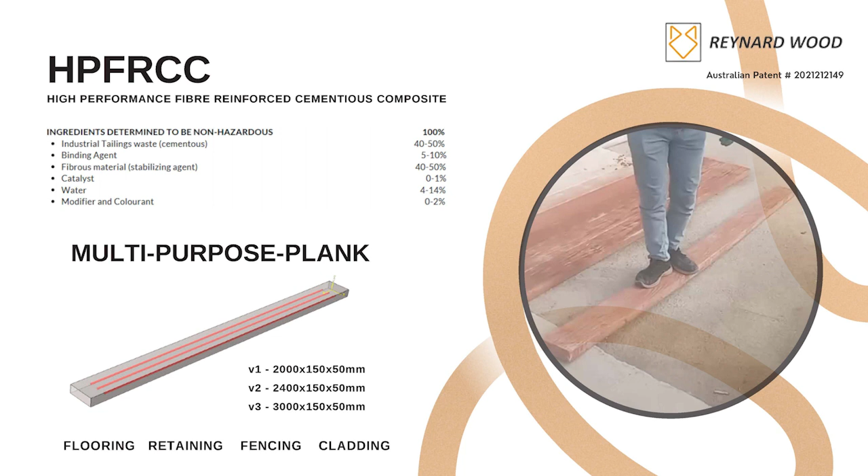Version 1, 2 metres, made to fit inside a container as prototype. We've now passed nearly 4 years, tests, no complaints. Now version 2, with market research and feedback from builders for the right size, and we're only just doing the testing now in country, but the factory has increased quality and performance from version 1. Version 3 is not yet developed.

How we measure the carbon or the benefit with this product is through a life cycle assessment and carbon product declaration and environmental product declaration. Reynard Wood is an early entrant to the market. With version 2, we can now help retrofit existing built systems, so you don't have to replace the whole system, which helps the environment.

But then obviously it's got the waste materials from the industrial tailings, gathering of those materials, limiting other high intensive processes, not putting any Portland cement, using fly ash, biogenic carbon using grass type plants and other methods. The environmental declaration is pretty much a workflow from cradle to grave on how we're actually producing this at the moment. Aussie operations, very low cost, work from home, outsource the logistics.

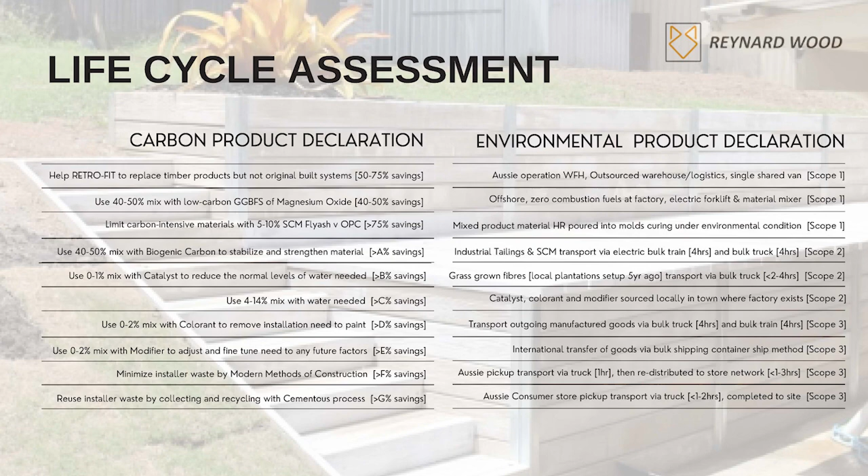The distribution channel is large, so looking through the independent hardware group channels, potentially maybe in the future with Bunnings, but we're there to start scaling out with the new version.

History: starting out mixing in a cement truck, bringing it to market, testing it in the markets, being very responsible, working in a landscape outdoor environment, testing the strength of this product. A lot of people will say it won't work, and it does. It's not breaking apart, it's maintaining its solid state, and it's looking very positive.

So there's another 2,000 planks on the way off the ship to start restocking. The next challenge will be to keep the flow going and expand from the 20 stores we've been in the past to reach the 300.

Certificate: Australian patent and worldwide patent. The worldwide fits in with the strategy to be global. So the interest is to support Australia to enable this capability for consumer products, but then also promote worldwide as an Australian initiative, showing responsibility in our biggest export of sales and making byproducts out of that waste.

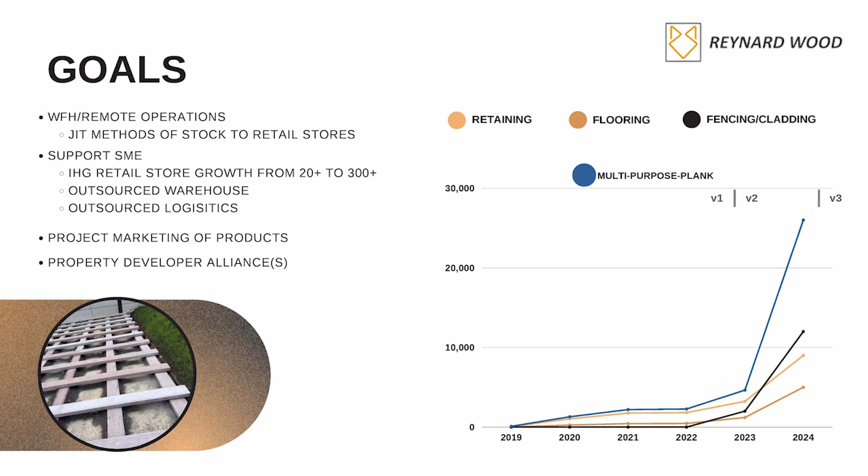Goals: you can see from the multi-purpose plank product with its versatile capability of retaining, flooring, fencing and cladding, how the sales can accelerate. We've only really been firstly sort of machine gunning out to 20 odd stores throughout New South Wales, but really focusing on a core 1 or 2, which are doing really well.

So now just to replicate that one store throughout a whole larger network will be the next challenge. We've got an outsourced warehouse set up for Sydney and Melbourne, and Brisbane will come online next year.

And then what would be really ideal is project marketing of these products. Developer Alliance could probably help that, but ultimately, the biggest barrier is the installer wanting to stick with timber because it's what they're used to, and sometimes they might feel they get a job done quicker.

So, in summary, I'd just like to say the best defence against global warming is recycling, which is what this opportunity is. Thank you.

Questions? I was trying to get away from that thing. From us? Excellent. Thank you so much for that, George.

How much recycled material, on a percentage basis, goes into a volume of product? Currently it's at about 55%, and that could possibly be increased. Ideally, the reduction in use of fibres as we go, or perhaps installing more longer structured bamboo rods that we've had in the past, could take up some more volume.

How are you overcoming the strong preference people have for natural wood products, in your approach and expansion? Where the stores are really selling it well to their customers, they're enabling it as well, because a lot of the timber products we're focusing on in the landscape area have dangerous chemicals injected into them, like arsenic, going into the ground. This product has none of that. Unless it's pulverised, the fly ash won't come out, but other than that it doesn't leach. It's very good for the environment and for humans.

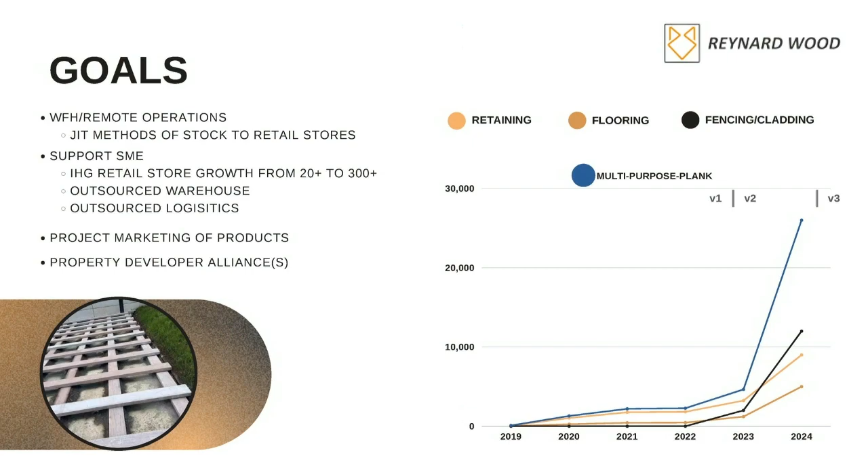Have you looked at railway sleepers? I'm a kind of small startup, so I know that would be a huge opportunity, and I'd probably need some networking and other ways of getting in to help source the materials in that space.

Thank you. Here we go.

When's the best time to plant a tree? Most of us know that's 20 years ago. So equally, climate technologies and sustainability technologies, we needed to start 20 years ago as well. We need to do the energy transition - we all know that. Renewables are a big key factor in getting to our net zero ambitions. But we know that the supply chains, the built environment, there's a lot of embodied carbon that needs to come forth in products, and this is why we're here. This is why we love MECLA and the initiatives happening. I'm a proud member of MECLA.

At MCI Carbon, we're looking at taking emissions and stopping them from going up into the atmosphere, transforming them chemically into products, embedding carbon into the built environment, like concretes and cements. We're making these products with partners like a low emissions or negative emissions plasterboard with a major global player. We're looking at cement products too, and we've got one of our cement products down there. I'll talk about the journey a bit, because it's important to understand how this technology is born out of inspiration from Australia, with a global view to helping solve climate change. We're really looking at transforming large-scale CO2 into products.

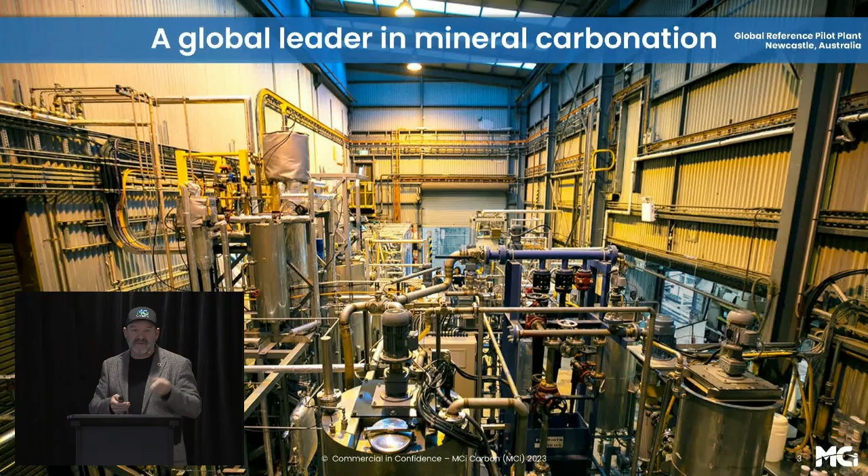MCI's technical headquarters are in Newcastle, and this is what we're running every day with our customers — taking feedstocks, CO2 sources, and then making products. Testing those products with our customers and with different groups around the world, getting the specifications, and then taking them to market. So we're building a demonstration plant now.

We won $14.6 million two years ago from the federal government. We've matched that with our own investor money. We're doing a capital raise right now, and this will basically transform 10,000 tonnes of material, which we're using on a large scale with our big industrial customers to do big trials. So we're ready at the end of next year to start doing big trials with the likes of Laing O'Rourke and others to basically get this into market.

We have a massive demand signal from our customers. If we could make 1 million tonnes now, we could sell it. So we're very, very excited.

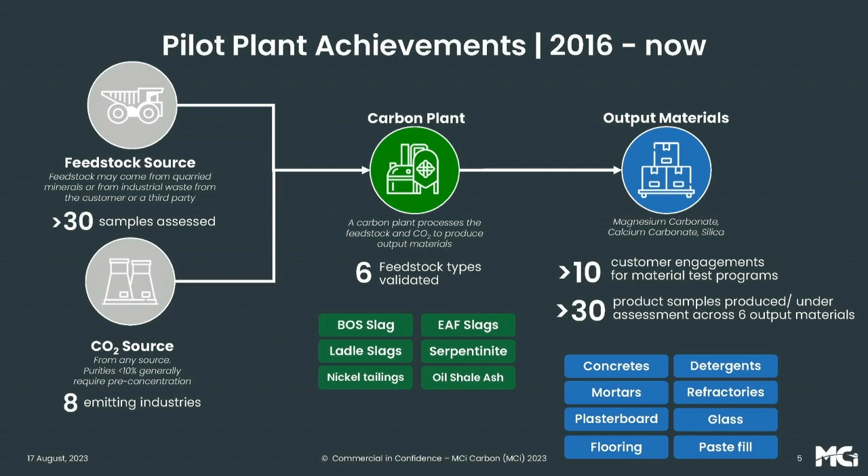We've done a whole lot of characterization of the techno-economics, the validation of the technology, the scaling up of the technology. This is built with chemical engineering expertise out of Orica over the last 10 years. We built it out of their group, and they now joined MCI as the team. So we actually were born out of one of the biggest chemical engineering companies in the world, the biggest explosive manufacturer in the world.

So we're looking at slags, serpentinite, oil shale ash, all kinds of nickel tailings with big miners. Any of these are our feedstocks, and we can transform them into multiple products. So we built a platform, not just one product — this is a platform technology that can be integrated. It's like a carbon refinery that would sit next to an emitter that has feedstocks locally and has local markets and also international markets.

So we've been doing a lot of characterization, testing these products for strength, as substitutes or as new products in the market. It's a very big play on our part. We're very well supported by governments now in play around the world. We've got a whole lot of really top quality expertise — 50 people and growing.

We're big in Japan. We've got the Toshu Corporation invested in us, and Mizuho Bank this year. We're off there next month, and we've got a whole lot of different customers. We're helping the Japanese decarbonise. So we've got a whole lot of emerging markets, a whole lot of emerging customers.

We are a great team — that's what we are. MCI is a fabulous team. We're committed. We're on a mission to put away 1 billion tonnes of CO2 by 2040, and we're looking for supporters in that and advocates, and we hope that all of you here today will become our advocates.

What are your biggest pain points at the moment to take it to that vast scale of commercialisation? Funding, absolutely. The biggest barrier to everybody at the moment is there's not the kind of capital required to accelerate our climate ambitions with all the different technologies. The financial markets do not have the gearing around risk to bring through technologies that need to buy risk and accelerate adopting the risk to get through. So there's a big gap. The classic chasm of death exists for technologies like us that are TRL levels 6 and 7 to get to the next stage. It's a very big challenge, and we need discount rates of 1% rather than 22% for new technologies. This will come with green bonds and the like, but that's the biggest challenge for everybody right now.

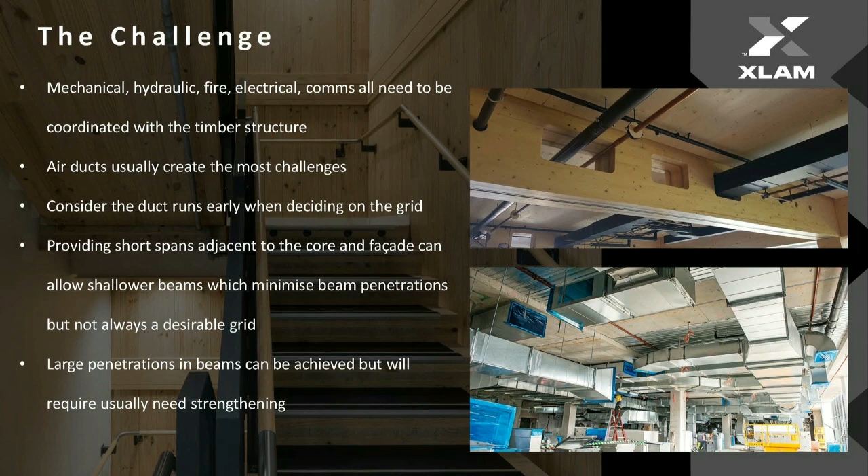So that led us to looking at this product that we developed in-house over a number of years. It's been kicking around for 3-4 years now. The idea is that essentially it's a lower profile floor system, mimicking the look of a concrete band beam structure, which everyone's probably well familiar with, along with some of the advantages of that sort of system.

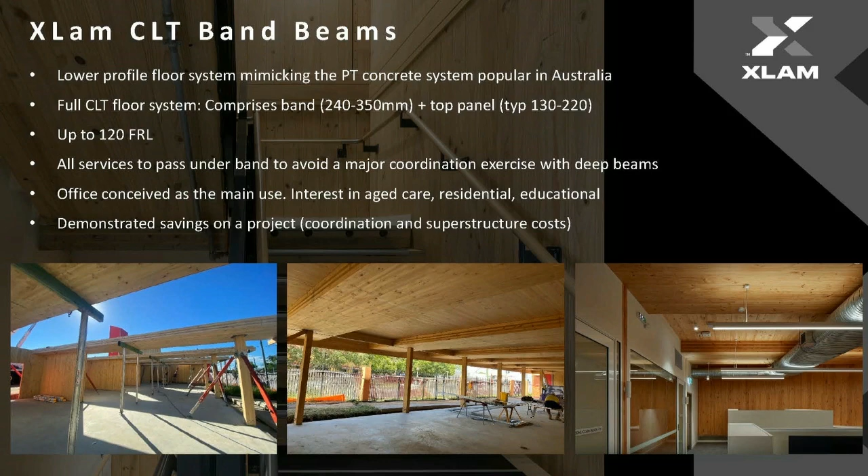On the bottom left picture there, you can see a panel that's up in the range of 240 to 350 deep. They tend to be at the thicker edge of that scale, just for the spanning ability. Up to 1700 wide, and then another panel running crossways over the top, which forms the walking surface. That's sort of slab and beam, but think of it as a very wide, relatively shallow beam.

It was initially conceived mainly as an office application for those large commercial projects, but it has had a bit of interest in aged care, residential, and some educational projects as well, which surprised us initially. It's designed for up to 120 FRL, and we've completed one project with it, and there was definitely some demonstrated savings from a cost perspective, as well as quite a good saving on the design coordination part of it.

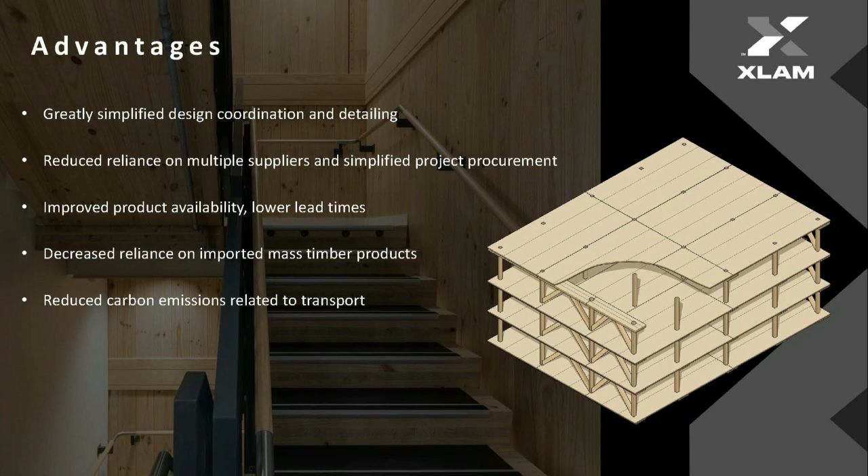So speaking to some of the advantages a bit more - it was a huge saving on the design coordination exercise. Having everything inherently run under the beams means there was really minimal coordination with the services guys. It was services-to-services coordination, not services-to-structure coordination, which was very nice for us and the structural engineers. It doesn't take away the services-to-services coordination, obviously, but that's one big thing to cross off the list.

Having a full CLT floor reduces your reliance on multiple suppliers. Getting more of your product from one mass timber supplier has advantages for procurement as well as cost. And the way CLT is produced compared to large-scale glulam, it's easier to get that volume up, and the production and procurement timeframes are a little bit better than what you'd see with glulam, so you can align that procurement timeframe a bit better with the product.

Having it all coming from a regional Victorian site to the major cities on the east coast is definitely a saving on transport compared to imported overseas product as well.

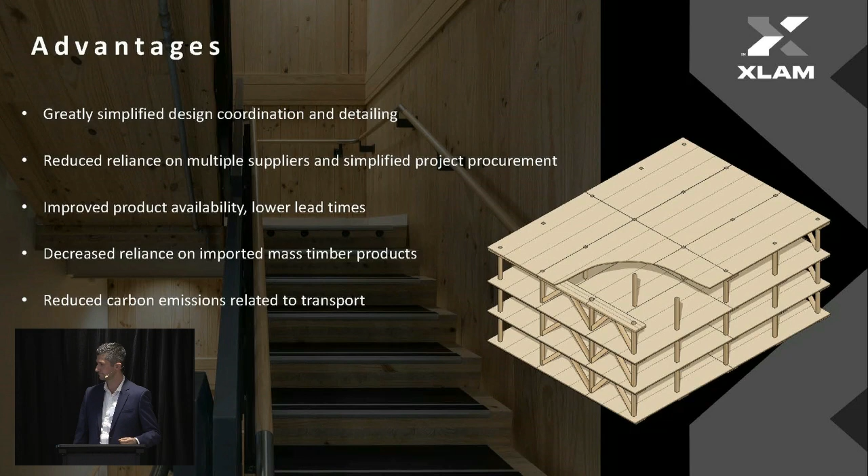From a sustainability perspective, the CLT band beams - it's just CLT, so it's the product that we've got EPDs established for. We've got PEFC certification, Declare Red List, all that type of thing. All the feedstock comes within 100 kilometres of the CLT manufacturing facility, so it's all very local in that sense.

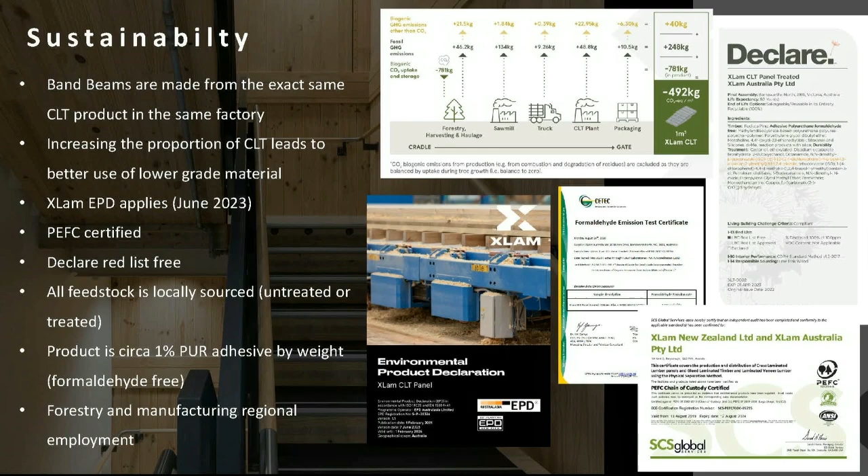A little bit of background to the product itself for those that aren't so familiar with it - it's less than 1% by mass adhesive, the rest is radiata pine, plantation-grown timber. It also uses the internal layers, the internal lower stress parts of the product, from a lower grade timber - structurally graded, but lower than the grade you're using in your framing timber - making use of that potentially not waste product, but lower value product, turning it into a higher value product.

So to wrap up, this is the availability - it's available now. It's just part of our normal CLT production, so it's available at any time. We've done some in-house testing looking at different ways of connecting the top and bottom layers. You can connect it in a way that you get some composite action for further benefit, but you generally don't need to.

We've completed a project in Queensland that worked really well. It's occupied, all good feedback on that one. We've got two fire assessments in addition to the AS 1530 Part 4 test to cover all that off. And we've got a data sheet that should say available now - we finished it last week. And we've got some ongoing development planned with the product.

Hempcrete, for anybody not familiar with the term, is a generic term for a range of insulative light masonry products made by combining hemp hurd - you can see that in the illustration on the left-hand side, it's a woody fibre which is the inside of the hemp stem - combined with a binder, a lime binder. There are a number available internationally, mostly lime-based, or all lime-based in fact, and some companies add a little bit of sand to that. We do, others don't.

The product is primarily used for non-load bearing walls - there's an illustration at the top there, that's an off-form non-load bearing wall, useful for residential and commercial construction or for retrofits. There's another product illustrated at the bottom, a lighter material we can use for subfloor and roofing insulation. The products are generally rendered externally but can be clad. Internally they can be used off-form, or clay rendered, lime rendered, or hemp lime rendered. We supply a hemp lime render - essentially it needs to be a breathable render, so it's a breathable system.

Our lime binder and our hemp lime render are manufactured in Sydney, and we source the materials regionally in New South Wales. We've been involved in the hemp industry since 1999. I began my work with hemp by farming hemp initially prior to commercialisation, then starting work at New South Wales Uni in 2000, worked there till 2006, built that first house out of the hemp that had been grown and processed, and have gone on to develop partnerships with farmers and processors all around Australia, including developing processing systems or supporting other farmers to develop their own processing systems.

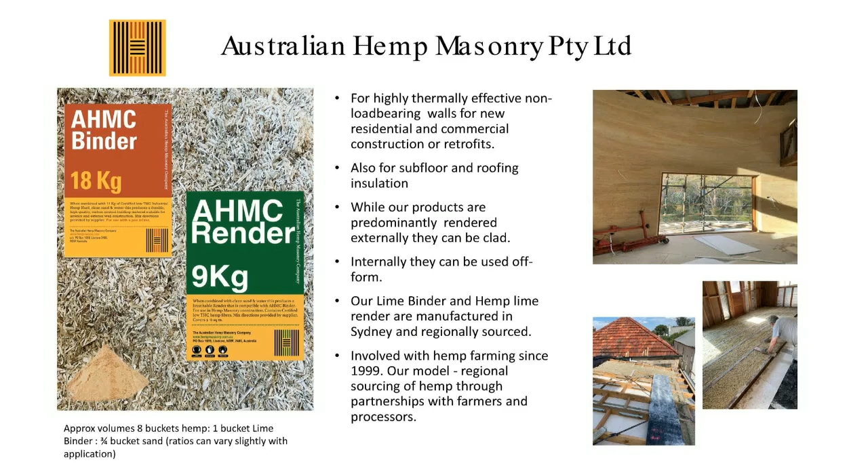The first of those was in New South Wales, then Tasmania, so we've now got some projects going on down there. Essentially the major component, underneath the illustration on the left, I've given an approximation of volumes: we're talking about 8 buckets of hemp to 1 bucket of binder and less than a bucket of sand, and that can be varied depending on the application. By far the greatest volume in this material is the fibre itself. It's a very lightly coated material that then is tamped between two forms around a structural frame.

Why is Hempcrete an innovative building solution?

It's probably the combination of performance characteristics that's extraordinary about it, that it does so many things. It's a low embodied energy product, mainly because of that massive amount of harvested carbon that's there in every cubic metre of the material. It's a long-term carbon sink, so the oldest hemp building, I think, is in Japan, a National Trust building which is 300 years old. But there's certainly plenty of evidence of durability in buildings that are based on lime.

It's a rapidly growing renewable resource, and in that I think it's quite extraordinary. A hemp crop has a turnaround of about 4 months, and in that period we can produce about 10 to 12 tonnes of dry biomass from 1 hectare, and given that this is a really light material, that's an enormous amount of material that can be produced.

Assessed as being an environmentally friendly biomass, so no risks to biodiversity. That was looked at very early on in the piece, both overseas and in Australia. Agriculturally useful, so quite extraordinary.

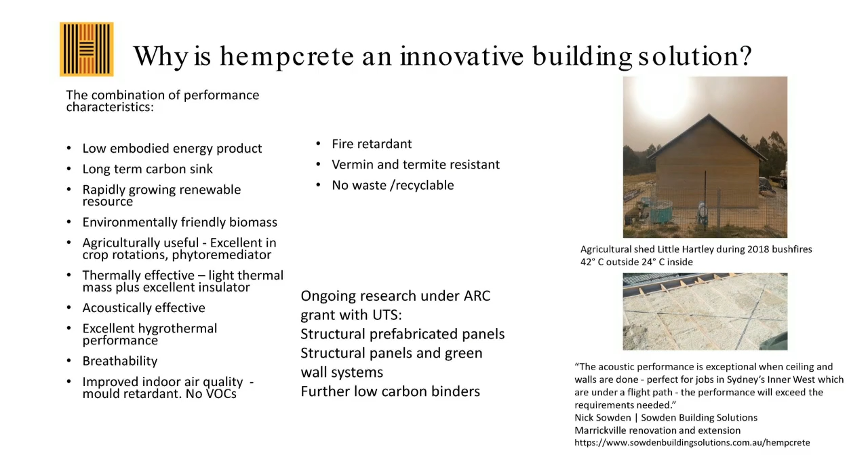To give two ends of the story, the Belgian Nuclear Research Institute used hemp and flax and assessed how they performed in taking up irradiation from irradiated soils, so effective in that way, used around copper smelters in Poland for cleaning up contaminated land. Within a crop rotation for a farmer it will give an increased wheat yield of 10 to 20%, and there are a whole lot of interactions. So it's a soil remediator or phytoremediator.

So really an extraordinary thing in what it potentially could do for carbon farming in Australia. We could really be harvesting massive amounts of carbon by introducing essentially better agricultural products that are farmed in a better way.

We're doing ongoing research at UTS, looking at structural prefabricated panels. The lived experience on the right-hand side, this is in the 2018 bushfires. Typical of hemp materials is their particularly good thermal performance, so 42 degrees outside, 24 degrees inside, with 250 millimetre thick walls, which is fairly typical. And then at the bottom, acoustic performance is also exceptional.

This was after a house was retrofitted, a renovation and extension in Marrickville, showing exceptional performance acoustically under the Sydney flight path.

Embodied carbon, so just going through this quite quickly now, 110 kilos per cubic metre is the estimated figure. We are reliant on European data. We're working, so both the Australian Industrial Hemp Alliance and the Australian Hemp Council are working on assessing carbon in hemp. But this product, my work with this product, covers both of those areas, both the farming side of it and the manufacturing side of it.

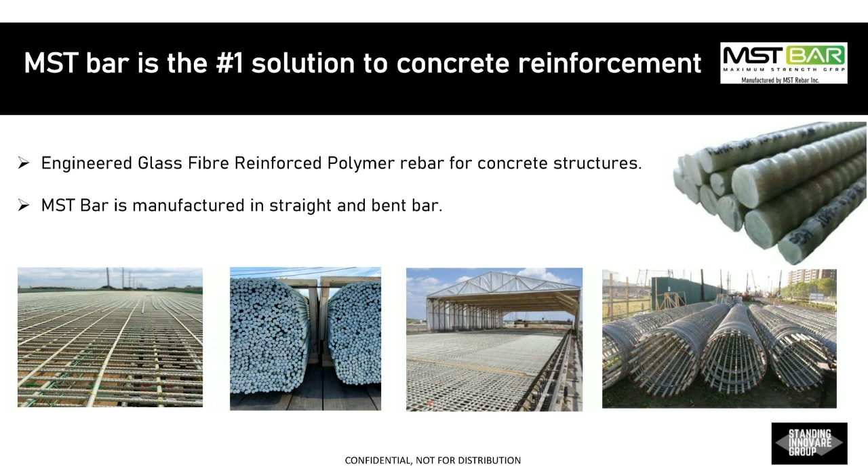MST Bar is manufactured in straight, bent bar, and flat work applications in a range of different sizes, from 10 mil up to 55 mil and larger depending on the order requirement. We believe it is the number one solution to concrete reinforcement. Why are we innovative, and why is our design harder, better, faster, stronger than steel?

It's because it's safer, lighter to install, and better handling and freight using MST Bar. It's higher performing and certainly stronger than steel. And it really comes down for us to being the premier product globally.

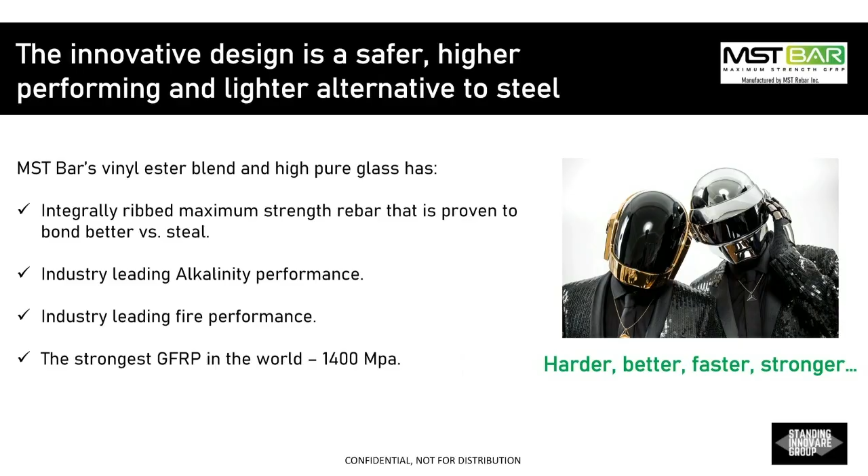Our vinyl ester blend is the best blend globally. We use the highest concentration of pure glass, over 90%, out of any pultruder globally. What does that mean? It means a couple of things. It means our performance in a high alkaline environment is second to none.

We're talking 14 pH over 3 months in a pressurized environment with no reduction in performance of the bar. Leading industry fire performance, over 700 degrees, minimum cover over 3 hours, retaining the strength of the bar. And as I mentioned, it's the strongest bar in the world at 1400 MPa average strength, whereas steel is about 450 tensile strength.

The other thing that sets us apart from others is the integral rib design. You can see here there's a rib design across the bar. That's why we have 3 times better bond strength than steel. There's no other bar globally that does that and has that design. Some will try, but they can't do it.

In terms of sustainability, we're 4 times less carbon intensive than steel. That's clear - it's a lighter product, so there's huge efficiencies around transport. If I could show you pictures of the trucks, you'd probably think it's not from Canada - it'd be somewhere else in the world.

In terms of per cube of concrete, MST Bar is about 20 kilograms versus steel at about 80 kilograms of standard reinforcement at standard spacing. What does that mean for recycling? By weight and volume it's already less than 1%. So in New South Wales alone, you can recycle MST Bar straight within a concrete structure and reuse it as a recycled crushed aggregate mix. That's a huge benefit.

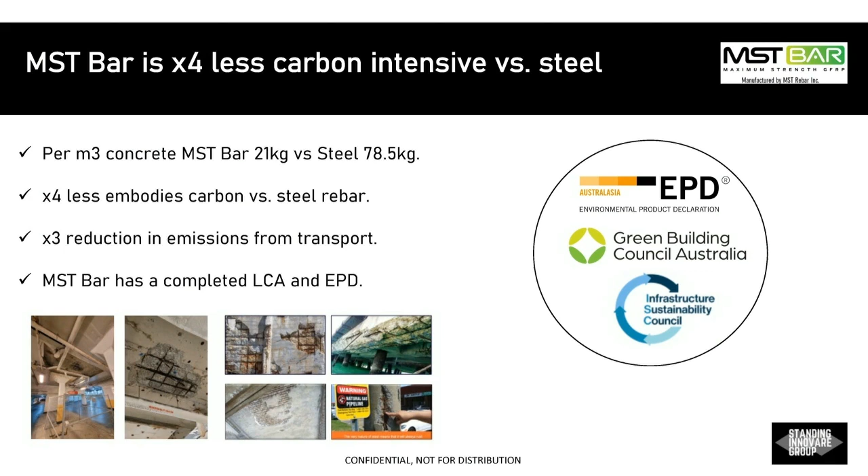We've completed the LCA and EPD, and we're working through locally for membership with the GBCA and ISC. The purpose of that is to provide contractors, designers and the like the comfort that we are going through this process, and that we're meaningfully trying to provide an option around a decarbonised product here in the market.

So with all these great things, what's the resistance? Why haven't we seen huge adoption? Well, it's a mindset thing. We're talking about disrupting steel, and steel is our biggest competitor. The biggest barrier to change is the mindset of the people in the room - trying to shift the mindset towards these early adopters.

Shout out to Fulton Hogan and Seymour Whyte for their adoption and application of MST Bar down in Victoria on MRPV, MRPA and level crossing projects. That's an example of the retaining wall structure on Pound Road that we used.

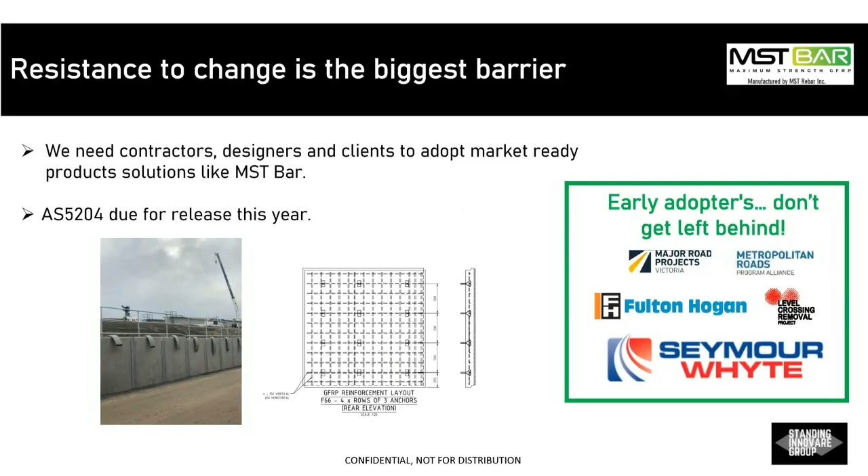So what we need is contractors, designers and clients to change your mindset and be like these leaders - be a fast follower, follow them, and adopt a product like MST Bar to change how we construct here in Australia. And yeah, that's it for me. Thanks very much.

So just to be clear, you're manufacturing in Canada, in Toronto, and bringing the product here? That's correct, yeah - we ship out from Toronto into Sydney. What would it take to set up manufacturing facilities locally?

So we need a market reaction first, to start adoption of the product. Australia actually has some of the purest glass sand in the world, so there's huge potential. We want to see the market react here and set up local production in advance of the Brisbane Olympics and be able to be a local supplier for that.

And Christopher, I know it's early days, but how are you getting this out to customers? So we import by shipping from Toronto and distribute from Sydney to Seven Hills. I meant more the sales process and your business model. We go direct to business marketing, using our contacts in industry and working with them to find solutions - so B2B marketing.

Can you talk a little more about the circular economy piece? You talked about recycling at the end of its life, but what about within the whole business model itself - if it's pure glass, how do you create a circular business model out of that manufacturing process? I think to ensure the performance of the product as a pure glass product, we would investigate some recycled glass options, but naturally it's going to bring down the performance of the bar. I don't think the market's ready for that yet.

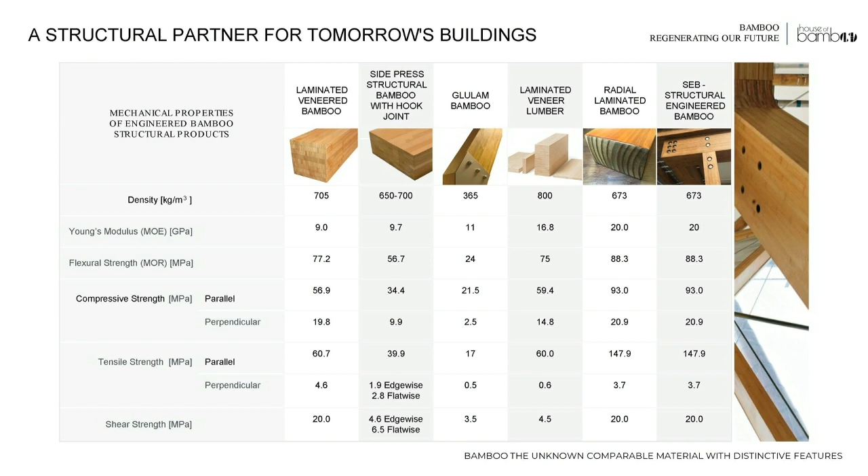There are 1,500 species of bamboo, and each of them have different mechanical properties, so they all have different results. The better you understand that, the more you start to see it. It is not timber, it will never be timber, it is not to replace timber. It is to partner with timber and help you with the supply issue, because it has properties that are outstanding. And if you use it in conjunction with timber, we're going a long way to solving the supply issue.

It's a no-brainer. But to really understand its benefit, you've got to understand the plant. It's super fast in growing, that's its key, right, super fast. And as a result of that, it stores up to 4 times more carbon, and in fact different species even are higher than that. We harvest the bamboo at 5 years for construction material. You can do it at a younger age for biochar, and for a whole range of different products. When you harvest bamboo, you select the culm at 5 years of age out of a forest.

You don't actually cut the forest down, you have to physically go in and pick each culm, piece of bamboo that's 5 years old, and that's why you can see marking on each of those growth rings. So the whole purpose is that we retain the forest, we retain biodiversity, and we continue to supply.

After 5 years, if you start a plantation, every year is the year of harvest. Continual supply. The root system is a rhizome system, so there's no need to replant. Cut it down, it regrows. It actually dies around 10 years of age within the culm itself, so it says, cut me down, use me, cut me down, use me. Nature gives us the answers. We've got a plant that's doing all of that.

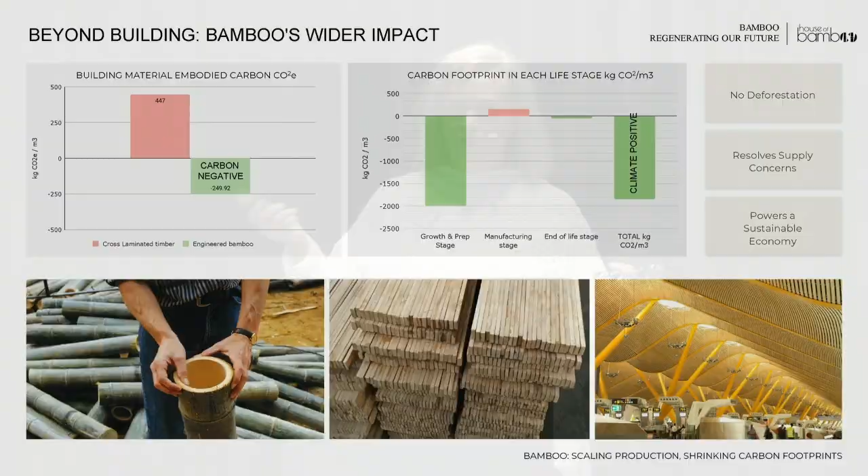Started working with the biggest commercial bamboo forests in Queensland, and we've got 250 species growing there. It will resolve the supply, and we can also do economy. From an economy point of view, we can have jobs, and we can grow it, and we can plant it, and we can make things from it, and we can restore our land. So this is it. This is the answer.

The plant's telling us an answer. Plant it, harvest it, supply it, manufacture, upscale it. It's the future. We can solve this together. It's an answer. Bamboo!

Jennifer, thanks for that. And let me help you with the rest of your pitch. Tell us about who you're selling to now.

We do both residential and commercial because we've been concentrating on the non-structural bamboo, and it's accepted, and we got it all tested with the Green Tag. It's both, so for a lot of fit-outs... well, we don't do enough, of course. A lot of fit-out work in commercial is quite a lot, and then some residential. It works both externally and internally, so we mould treat it for external applications, and it meets the Australian standards. So we've had great results.

It's just a matter of the paradigm of what bamboo is, and tiki bar, I believe, is the biggest issue. And as soon as people start to see it, they go, 'Oh, is that really bamboo?' So we do both.

And is there an industry behind you and around you? Not really, I think it's individual entities that actually start to do it. There's a little bit of, 'oh, does this really work?' And they try it, and then as soon as they do, we can just expand it. But there's not one industry behind it.

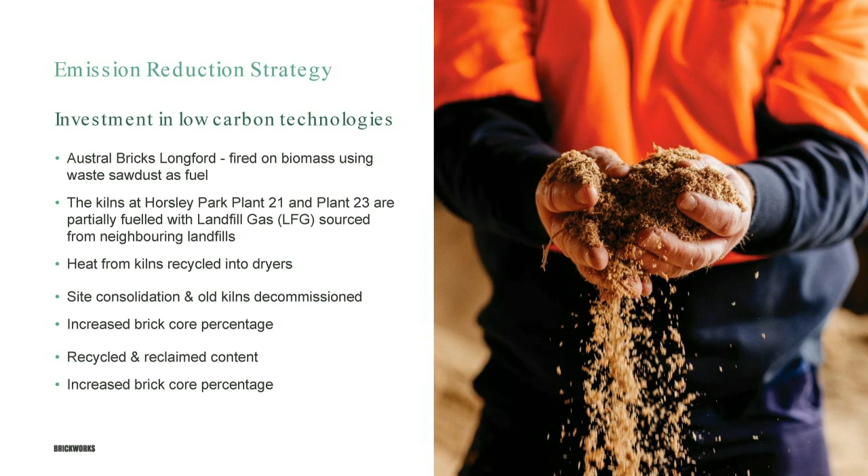We've increased the brick core percentage, so the holes that are in a brick - we do have solid brick still, but the ones with holes, we've made those holes bigger. You might think that doesn't do much, but it reduces the amount of clay you use, the amount of energy to fire them, the amount of fuel to deliver them, so you can fit a few more bricks on every truck. It reduces the footprint and contributes with the other things. We also put recycled and waste content back into our bricks.

We're investing in the future, and as I said, the easiest way to get your carbon down is to build new plants. Building new brick plants is not a cheap thing. We've just commissioned our brand new plant 22 at Horsley Park, which has cost just over $200 million. This plant has been in planning for years. It's going to be one of the most efficient, highest production plants, so the lowest carbon footprint of a brick, probably anywhere in the world for a brick plant.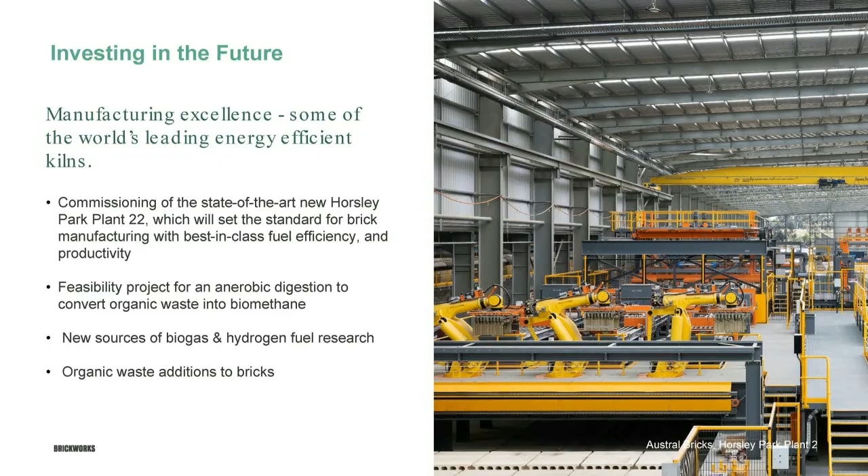We're currently working on a feasibility project to look at taking organic waste and fueling this kiln on the waste material, generating biomethane from anaerobic digestion from organic waste materials. We're well down that path, and it's another expensive part of plant to put into it, but it looks like it's going to be a feasible project, and we've just got to get the capital approved by the board. We're also now searching for new sources of biogas, and we've got some hydrogen fuel research going.

At the moment, you can't fire bricks with electricity. We can't use renewables to make bricks. We have to use something that burns. So that's why biomass, biofuels, and now looking at hydrogen to do that.

We've also got a project going looking at adding organic waste into the bricks, taking organic waste from a landfill site and putting it into the bricks. That also reduces the amount of energy to fire, because as you put it in the brick, it has a calorific value, so that will burn and contribute to the reduction of energy in that plant. All I need is the EPA to give me my licence extension to do that. We've done all the lab work, it's all sitting there waiting for that little bit of permission to do it.

Our carbon neutral bricks - with this, we take and measure everything in Longford, our Tasmanian plant. Everything from the raw materials, the fuel used for vehicles, transport from all our suppliers, all the energy used, all the waste handling, the water usage, packaging, transport to the customer delivered anywhere in the world carbon neutral, and the inherent emissions from burning ceramic materials. So we cover basically cradle to grave, A1 to A5, plus decommissioning in that cycle.

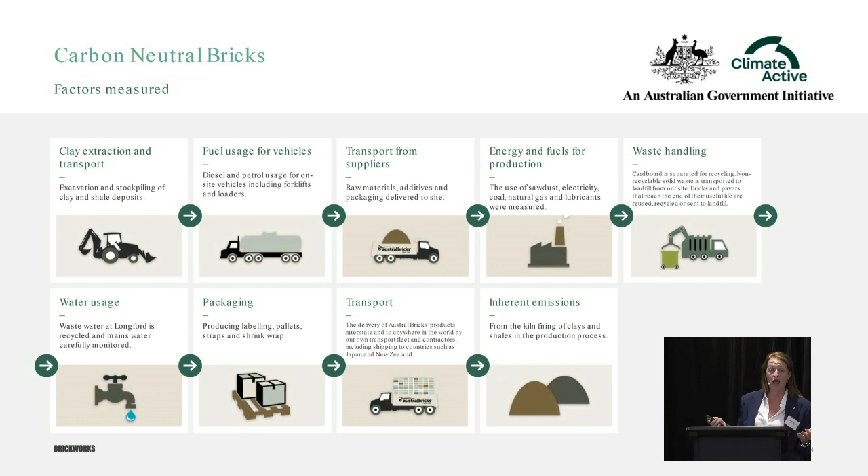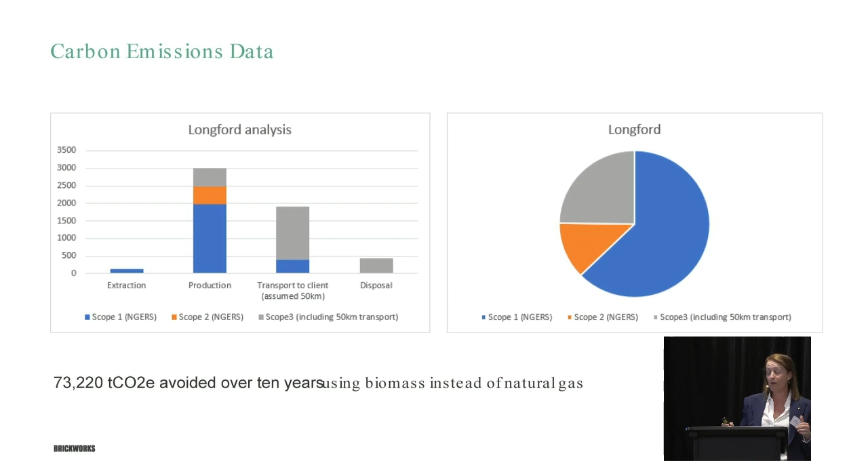This was NCOS to start with, the National Carbon Offset Standard, that's now changed and morphed into Climate Active. We've had our licence and certification for this, for 10 years this July, which we're very excited about. Collecting the data is probably one of the hardest things. Getting the data right, we now look at every part of that process, what energy we use, where the emissions come from, and how we can reduce it.

So we break it down also by Scope 1, Scope 2 and Scope 3 emissions, so we can actually get them down as low as possible. Scope 3 is probably one of the hardest to get down, because that's something we can't control. Our biggest component of Scope 3 emissions is the delivery of products to customers. So we do that by carbon offsetting to get to carbon neutral.

So over the last 10 years, we've abated 73,220 tonnes of carbon. These products are available in the market, used for all sorts of things, but you also get the normal value properties of a brick. They last a long time, they're low maintenance, energy efficient homes, so you have lower operational energy as well.

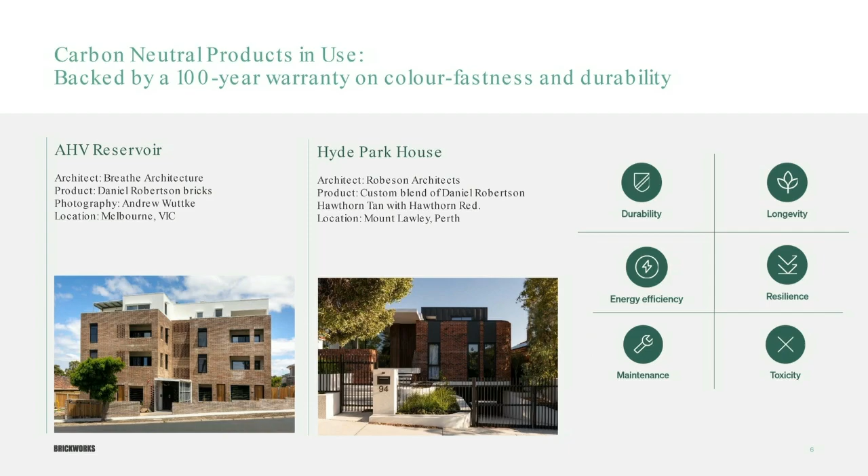And I just want to say the last thing to finish, that over the last 15, 20 years, Brickworks has reduced an enormous amount of carbon. We're a big energy user and we have quite high carbon emissions. We've reduced our carbon emissions 42% since 2005, and that's a big number. We're continuing our journey, we've got more to do, and that's the carbon neutral brick.

Thanks so much. How does the cost of a brick, your brick, compare to a normal one?

It's exactly the same. There's no additional cost for the carbon offsets that are purchased to offset that last bit. They're exactly the same. I'll just add, if you're taking bricks from Tasmania to somewhere else, you've got a delivery cost of the bricks, but apart from that, they're the same cost.

And following on from that, what impact does that have on your bottom line? How much does a brick cost, and what changes to your margin is that going to impact your business? It's actually very small in comparison.

We now do carbon opt-in because people also want local products. So we now do opt-in carbon neutral from our other 11 brick factories around Australia, and they're opt-in on a project basis, and we then offset that amount of carbon. It really actually has very low impact, and there's no cost passed on to the customer.

Can you let us know where you buy your offsets from, please? So we have an offset purchasing policy, and our policy is 30% of the offsets must be Australian. So they're either ACCUs, and then we buy some international ones to supplement it. Sadly, Australian ones get hard to source. With Tasmania, we always have some local Tasmanian ones in our mix as well because we want to support the local industry in Tasmania.